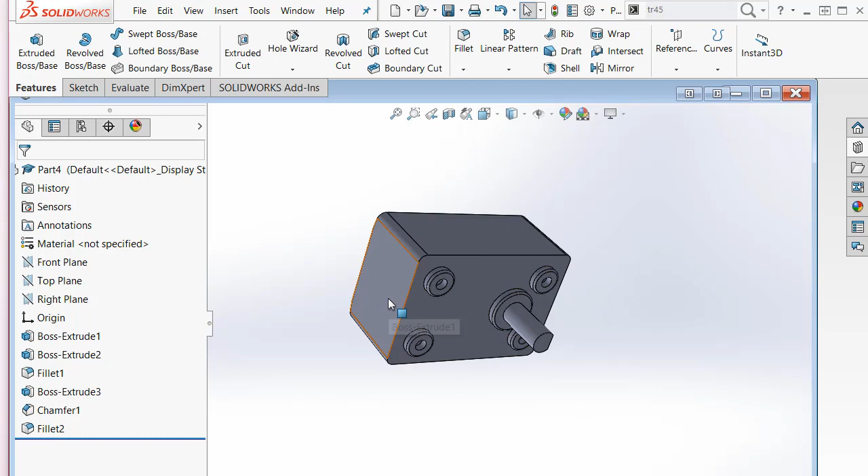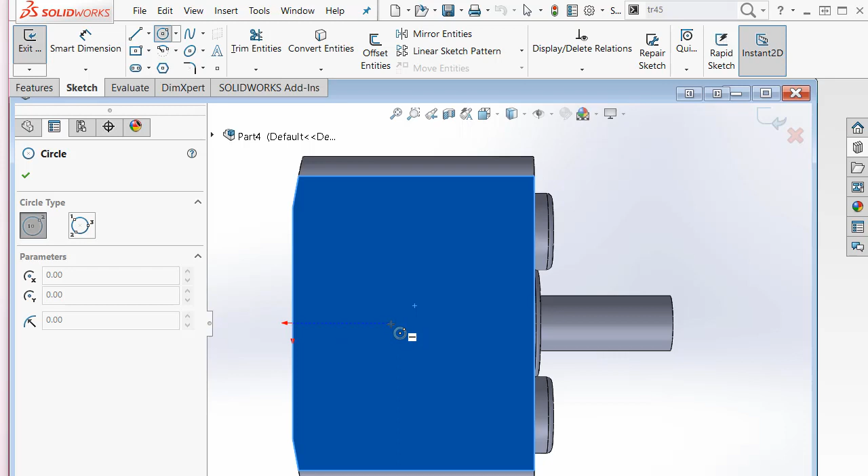Select that plane and tell it we're going to make an extruded part on there. Go into this thing, select that face of there, and it'll bring this around to look straight at it. Select the circle tool. You might not be able to see that there's a centre line on there that is getting lined up with this origin, and so I'm clicking there, I know I'm on the centre of the motor.

Okay, so now I'm going to select the dimension tool for the circle, and I'm going to click on that and set it to 24mm. And I want to position the circle, so I'm going to select another horizontal dimension this time, click on the centre of the circle, and that, move that down or up, anywhere will do, there, and I'm going to select that to be 13.

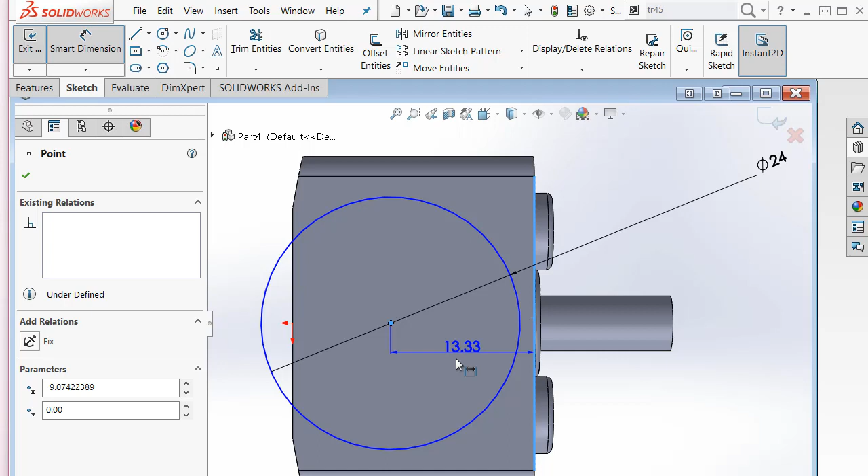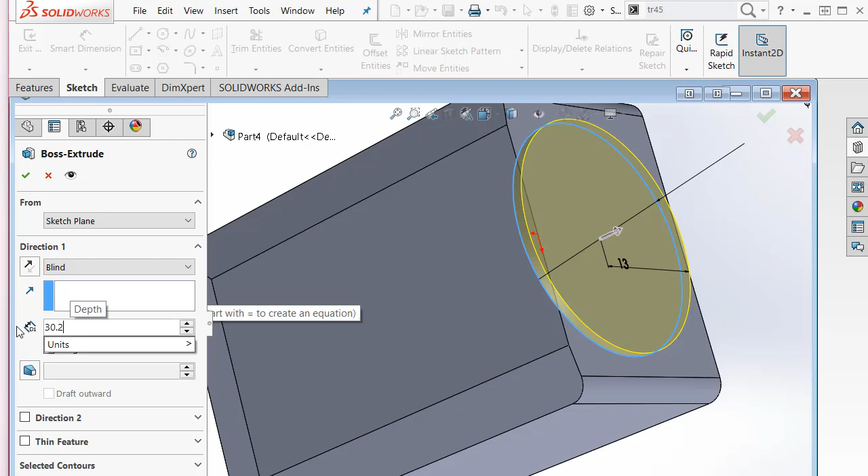Okay, so I've got the circle positioned where I want it, the size I want it, so we can move away from our sketch now and we can look at the extrusion. And we need to set that to be 30.2, so I'm going to rub out this 1mm here and set that to be 30.2. So the extrusion's got to be the right size. Click on the green tick to accept it. And there we've got the motor attached to the gearbox.

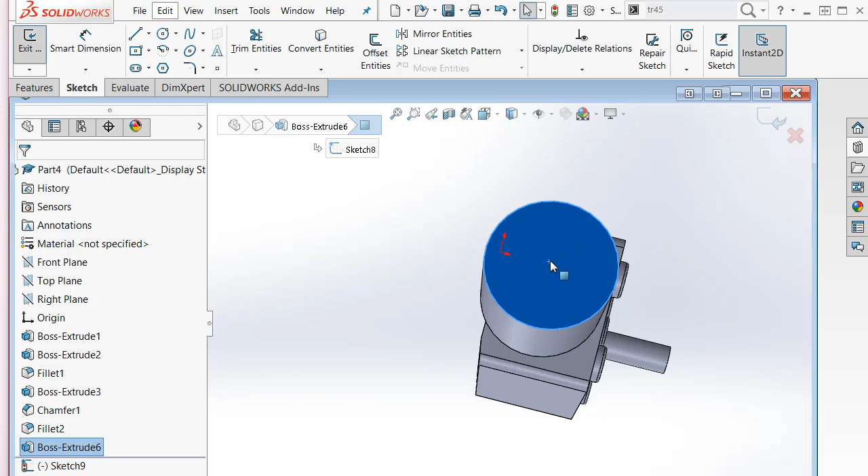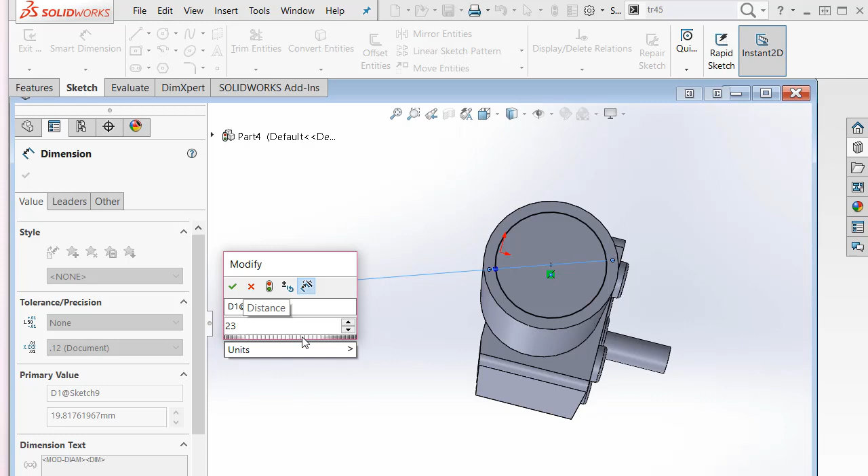We're now going to just select the end of the motor, and on here we're going to put an extruded cut. So once that comes up, we will select a circle. We'll find the centre of that. Draw a circle. Dimension. And we will set the dimension to 23. Okay, so we can click on the tick to accept that.

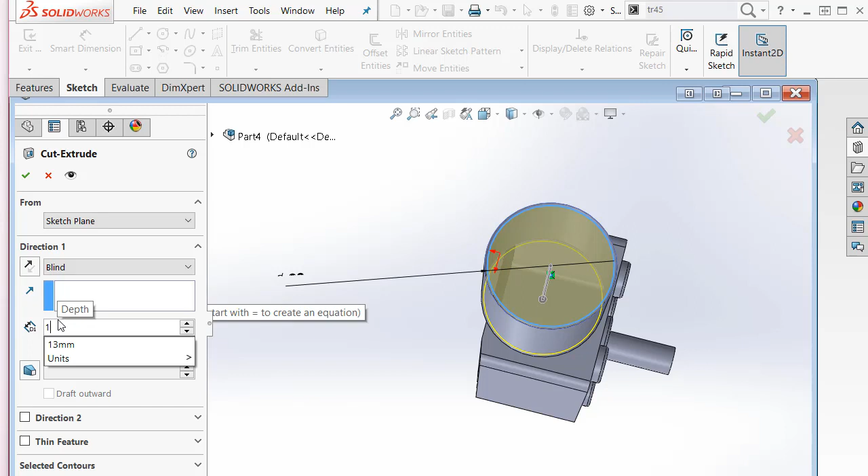Move away from the sketch now, go to our extruded cut. It's trying to do a cut of about 30mm. Change that, we want to make a cut of 1mm. Yep, it's making a cut down below the surface. So we'll say yes to that, and it's just pushed the end of the motor in a little bit.

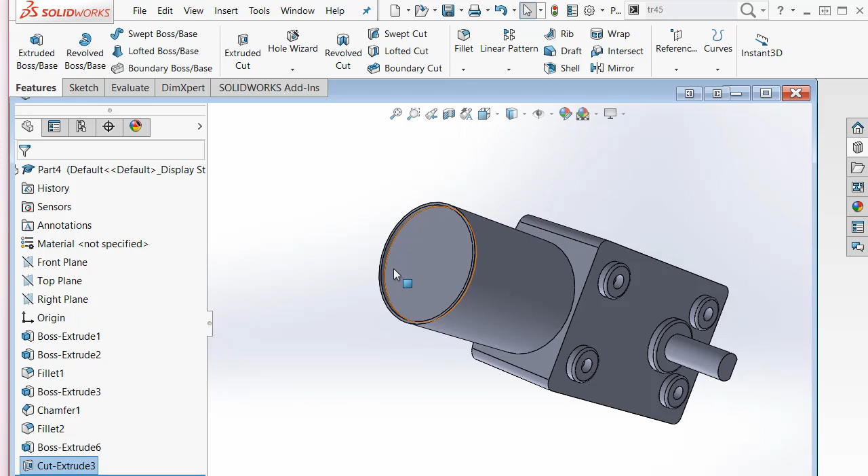At this point I'm going to leave the motor. There's quite a few more details that could be put on the motor, but it becomes counterproductive if you do too much, because once you have got a huge drawing of your entire robot, every time you move it you've got to redraw the whole thing, and you can really slow down the redrawing times if you make each of the parts too complex. So this is complex enough for this motor.